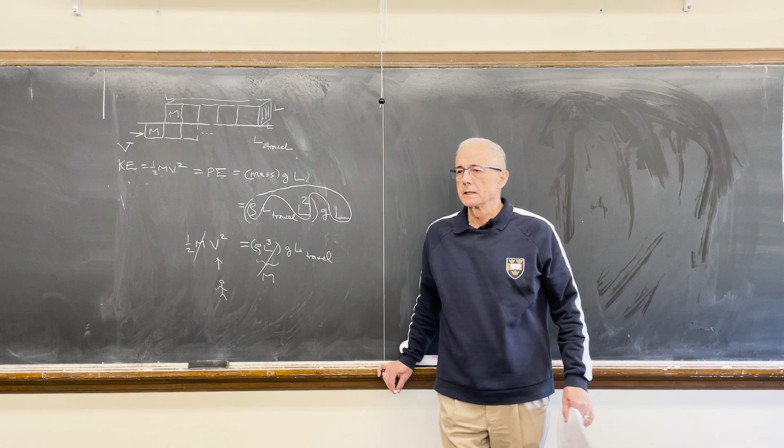We make a big step in the direction of answering the question, well, this is all interesting about animals, but what about us? So remember, in whatever you do, always ask: why is this important to me?

Well, it depends on your interests. If you're interested in predicting speeds at the Olympics, you can predict speeds at the Olympics using the formula. You can say, tell me the size of the sprinter, and if that person is tall, he has an advantage. It's the same in swimming.

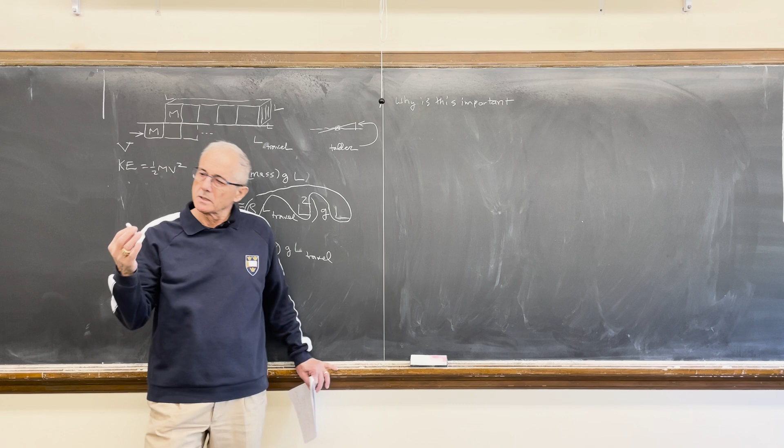In swimming, even though the swimmer is horizontal, here's the surface of the water, and the swimmer is oscillating - basculating, that's the French word for it. A taller person lifts his head and shoulders higher above the water. So athlete size has the same effect on speed regardless of medium. That's how you predict that the fastest swimmers should continue to come from athletes who are bigger.

And you can take this little hint all the way to ending all sorts of controversies about competitive sports. But why is this important to all of us who walk on Earth?

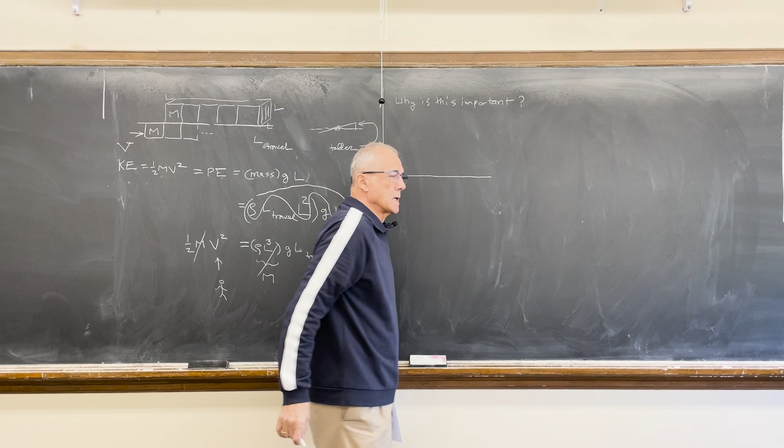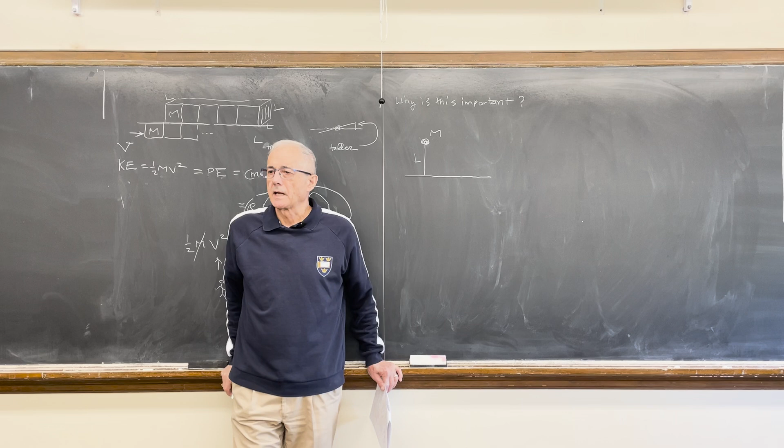Let's take a look. I had a one-scale model of the moving animal, body mass and length scale, and I drew it as a cube or as a sphere. I can also draw it as a stick of body length L, and concentrate the entire mass at this point. So that drawing is equivalent. I know, of course, I wrote it many times, this M is density times L cubed.

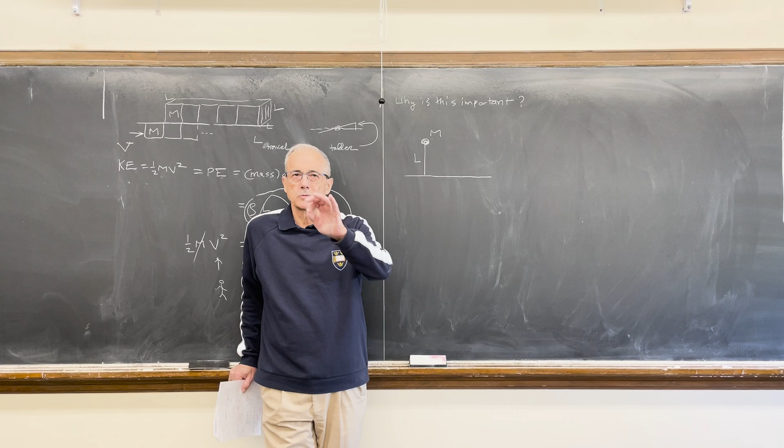But I draw it this way to begin questioning the actual rhythm of this object as it moves forward. The story began with the fact that the so-called cruising flight at constant altitude, for any bird, is in fact a zigzag motion, okay?

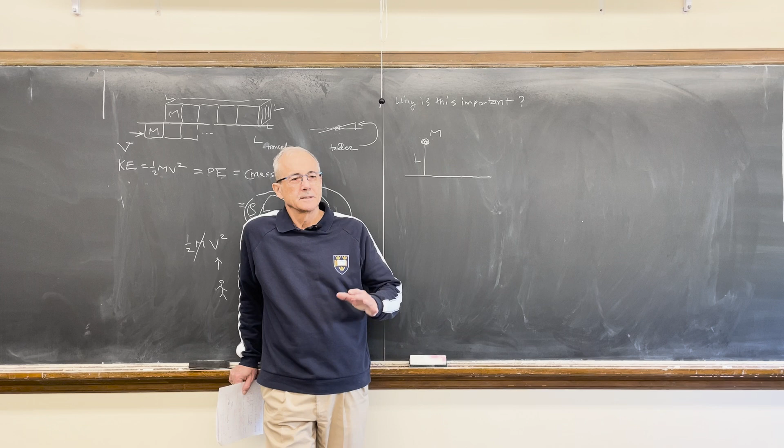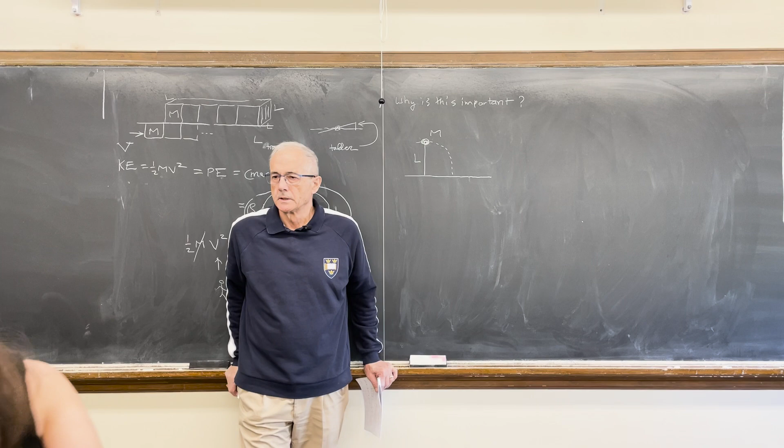If somebody attaches a light bulb to your head and lights it, and then makes you walk with the light on a very dark street, that light on the film will be doing this, you see, because the stick falls forward. You don't fall all the way to the ground because you have not one stick, you have two - you have two legs. But the fact is that the center of mass of the body is falling forward.

And then the story continues. From a greater altitude, the falling forward velocity is bigger. But during this fall, the horizontal velocity component decreases, all the way to zero. When you hit the ground, you're not going forward anymore.

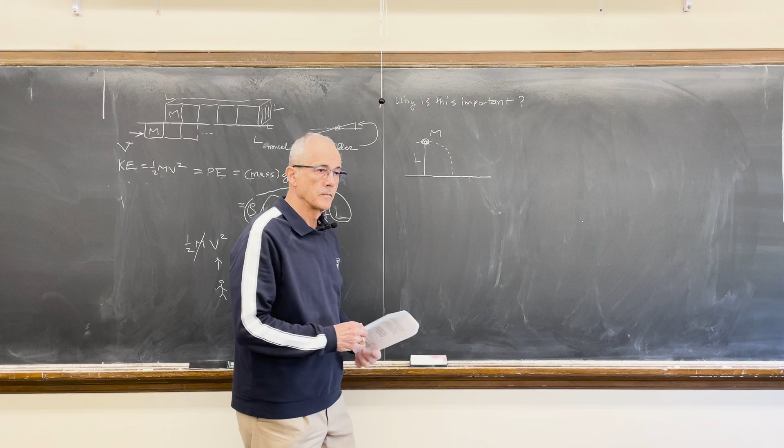The fastest fall forward happens when you are close to the vertical - we'll call this angle theta. In this regime, the speed forward that you acquire is the greatest.

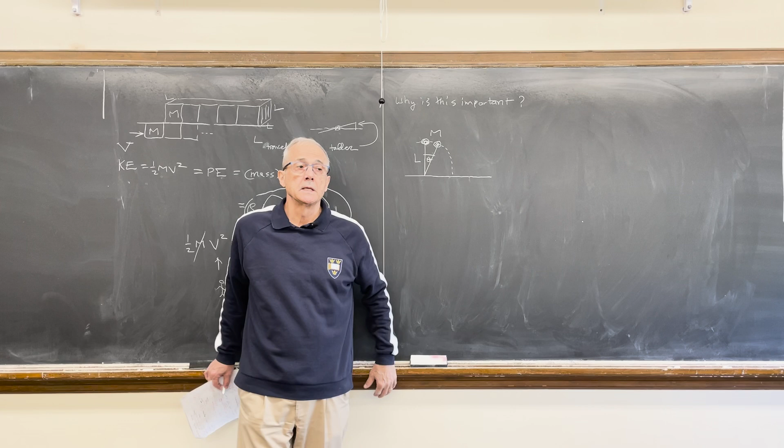You have this experience when you're riding on a Ferris wheel. On a Ferris wheel, your speed in the direction of rotation is greatest when you're at the north pole of that circle, and then zero here, then it becomes negative at the south pole.

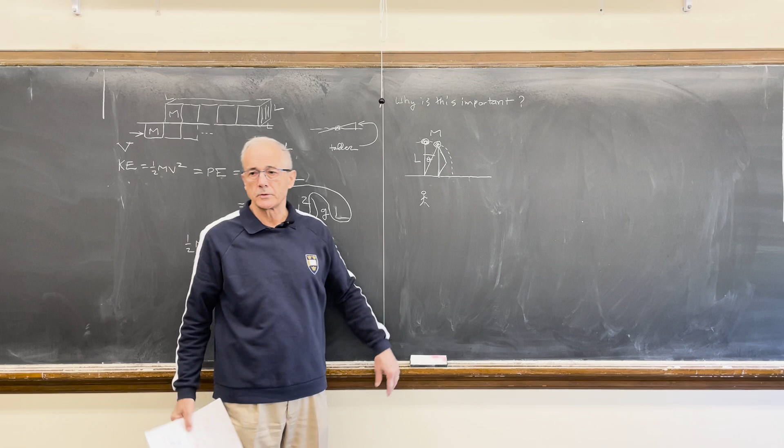But you're not interested in dealing with the subterranean world. And what next? In the case of the person - this is you - what next is not a disaster, because you have a second leg that steps here, except that the second leg has to be bent at the knee because the distance to the ground is shorter. And the knee is equipped with muscles that extend the femur and the tibia in order to lift the body to the altitude from which it fell.

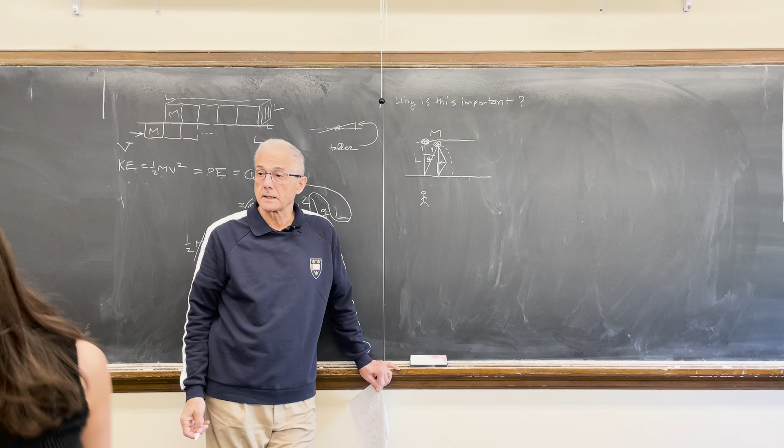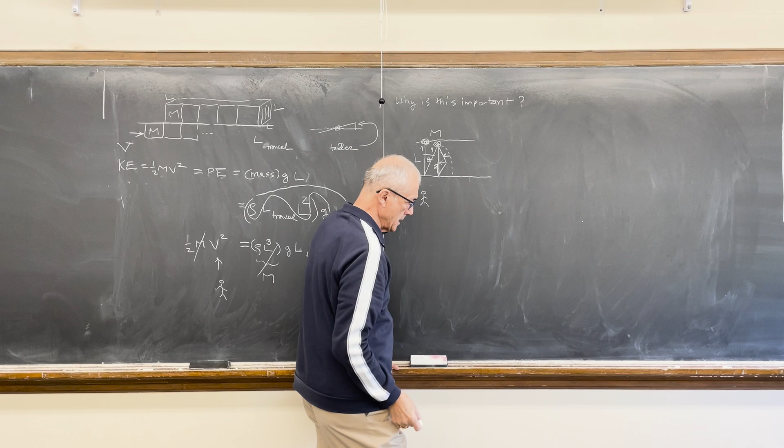So if this is leg 1, and leg 1 is here, then the end of the so-called cycle is when leg 2 does what leg 1 did - this is leg 2 arriving here. I draw only the trajectory of the top. The trajectory of the top was like this. So if this is leg 1, this is leg 2, leg 1 again, and so on.

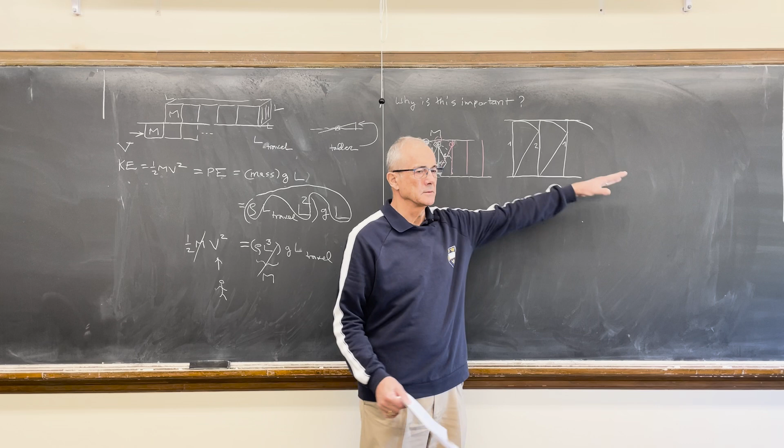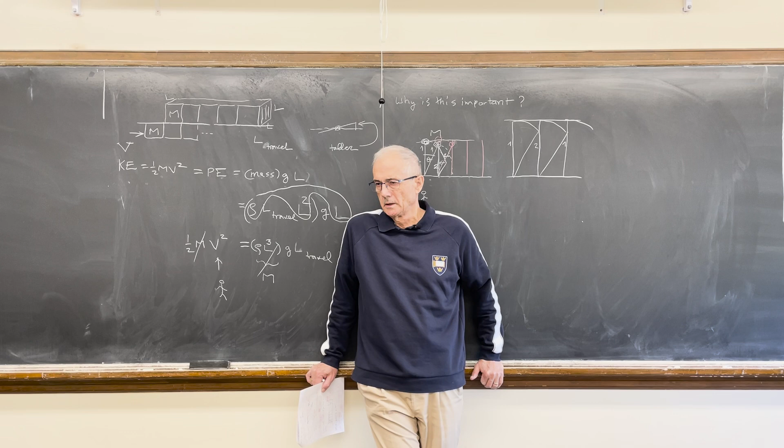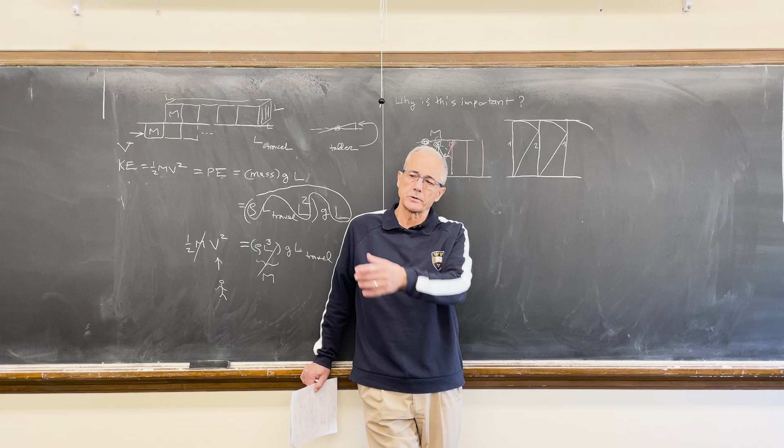It's a little tough to visualize this, meaning let's call it rectilinear motion due to stepwise wisdom of trying to stick to the vertical. Incidentally, this is why walking is tricky business. People fall, especially as they become old, or they trip and fall at all ages, because people walking or even standing up are inverted versions of the pendulum that Jack mentioned a few minutes ago.

And that's the sort of act that you see at the circus, holding the ball at the top of a stick. So it would make sense from this that the further the angle goes down, the more you accelerate, and that kind of makes sense because sprinters lean over a lot in the beginning. I'm wondering if you have any insight as to why sprinters start the race taking a series of steps while they're pretty much diagonal, but towards the end of the race they're all vertical.

The sprinter starts that way in order to, like any animal, prevent itself from hitting the ground. So the survival of the sprinter out of the starting blocks depends on that person's ability to avoid hitting the ground with his face. That is achieved by accelerating out of the starting blocks so that the body is left behind, meaning it's lifted or raised due to the effect of legs running faster than the body. But that only takes a few steps. Once the running position is reached, then it's all this kind of repetitive cycle.

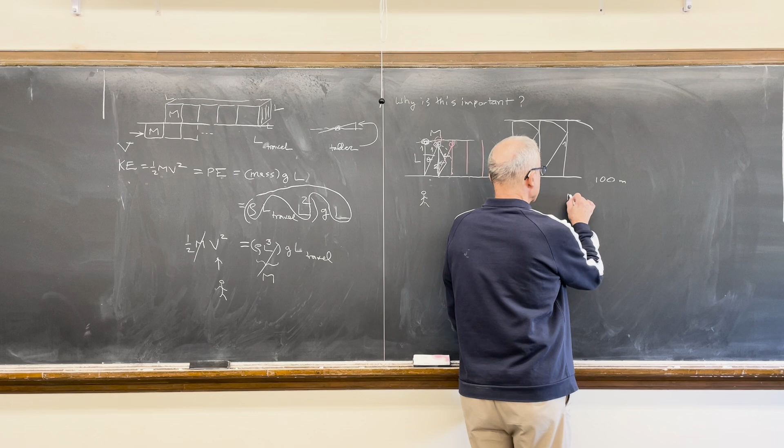Women, 50 steps. But you know why more steps? Because women, even the fastest, are shorter than the fastest men.

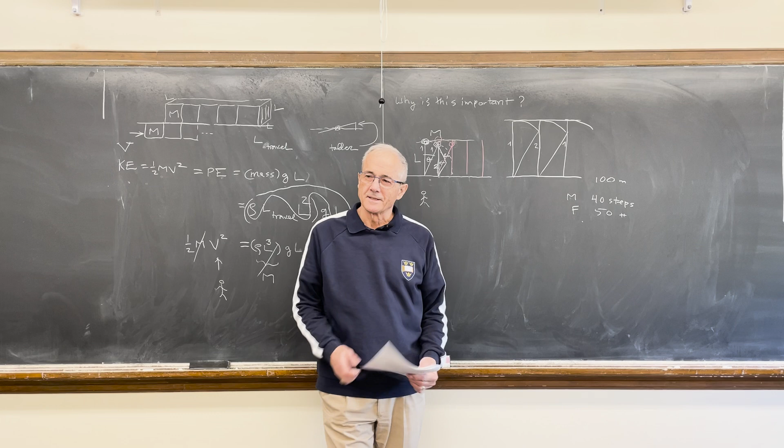You get this, used to be QED, quod erat demonstrandum. Now it's spelled duh, you've read that expression. It's pretty obvious if you know these scaling discoveries. Let's see now.

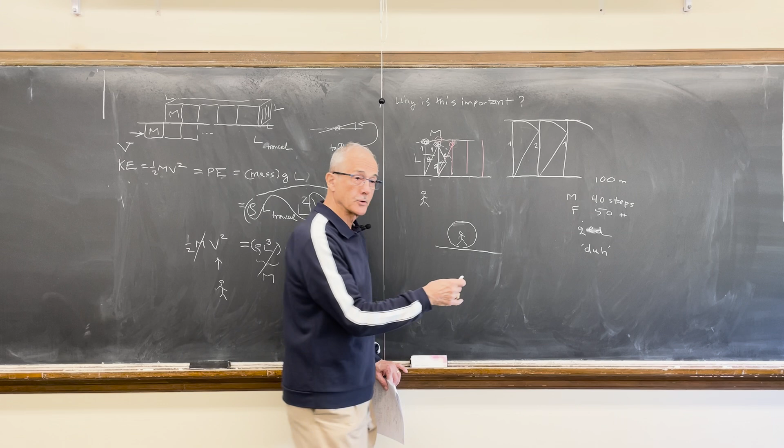There is a way to visualize this particular bit of mechanics. I don't know how many of you, when you're really tiny, crawled inside an empty cylinder. Where I come from, that was an empty wine barrel. Here's the on the ground. And you walk inside this rolling object. You think you're walking, you do this motion. But because the cylinder is rotating, you are always standing up as you walk, and moving is the assembly, meaning the cylinder.

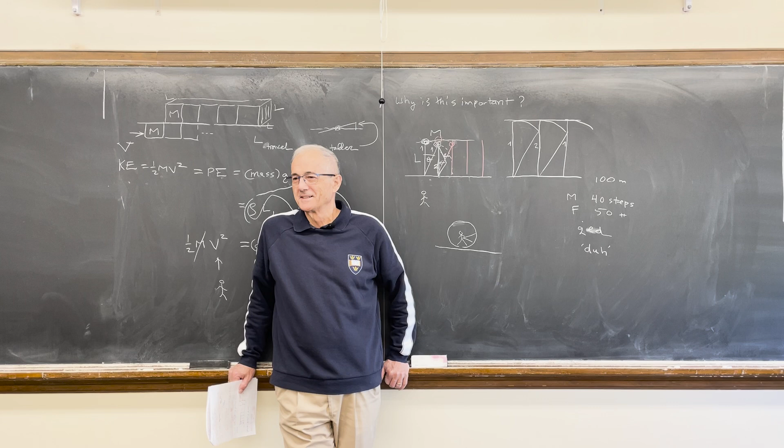You never did this? No, you did? It was a sphere, though. Okay, there you go. With that, you can expand the joke in all directions. Yeah, that's interesting, isn't it?

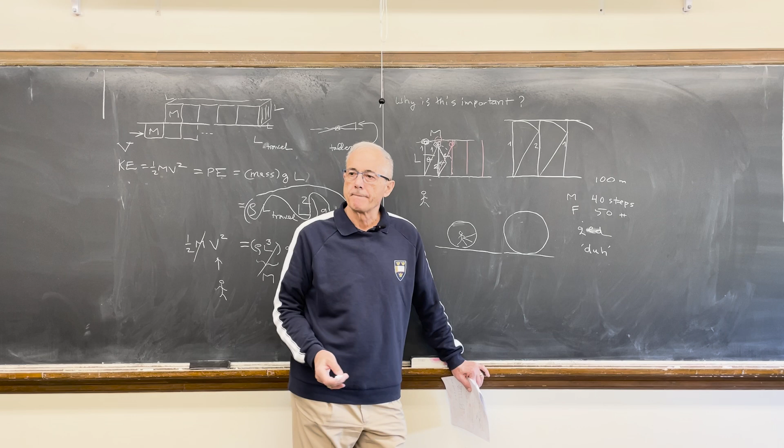Look at this. In that circle, you're a wheel, you say. Great idea, let me draw the wheel. And you again.

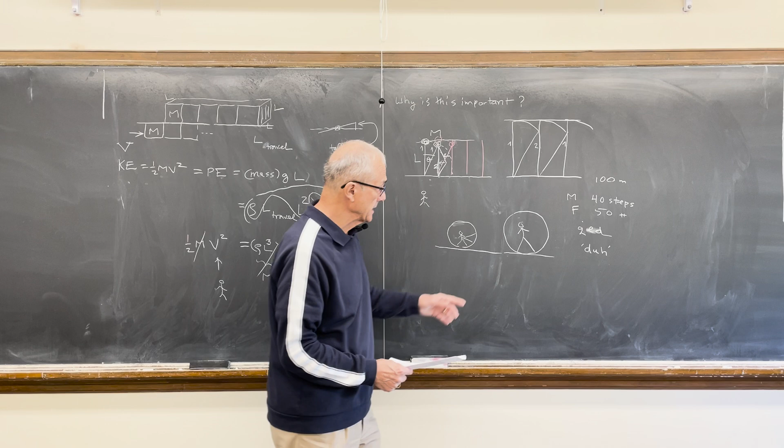Walking is in fact this motion, except that if the camera moves with the rotating wine barrel, the camera will see you taking one step after another, meaning that if this is 1 and this is 2, then it would be 1 again and 2 again. So bipedal walking is, in this case, a natural wheel with only 2 spokes. That is the lightest wheel.

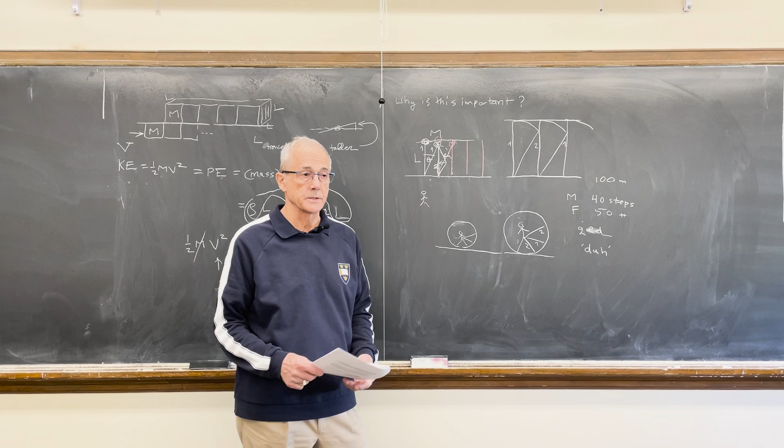What is evident is the wheelbarrow is from China. That is a little vehicle for carrying material, supported by one wheel at the front end. Anyway, so the wheel operates on this principle, but now that's the view from today.

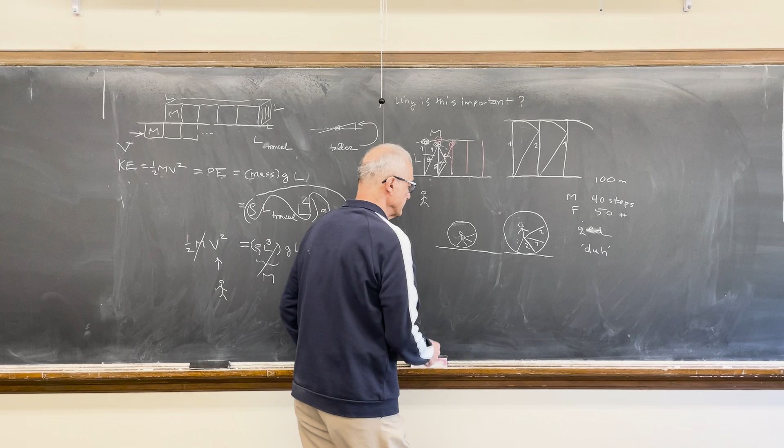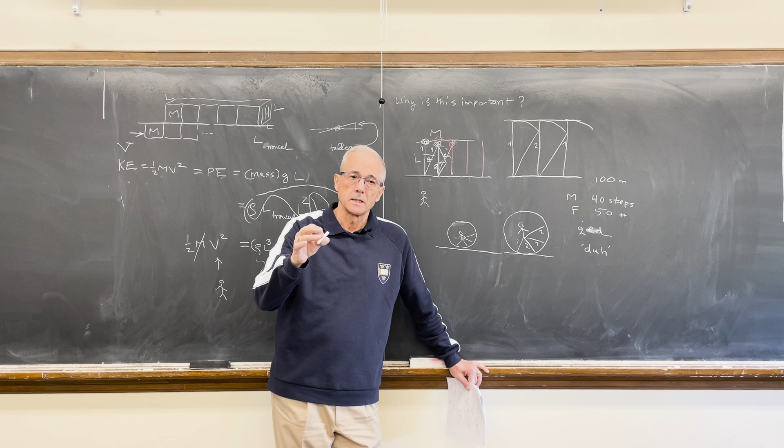Artifacts that are being discovered, you've seen them drawn on the chariots of antiquity. The oldest wheels that you see in the bas reliefs, say Persian architecture, Babylon, these places, those wheels were solid. So, solid wheel on an axle.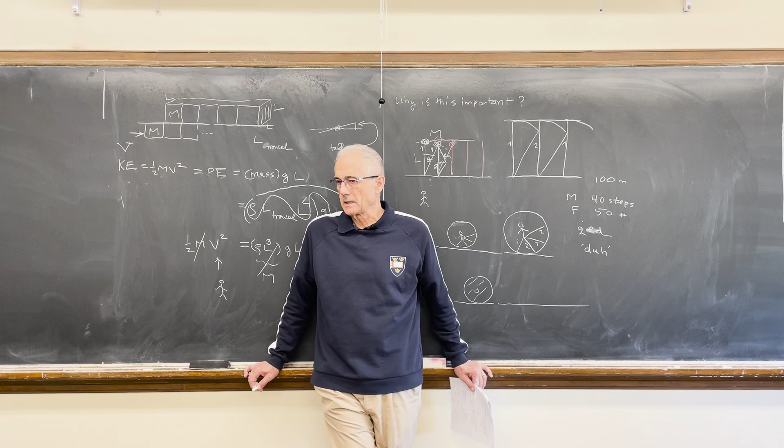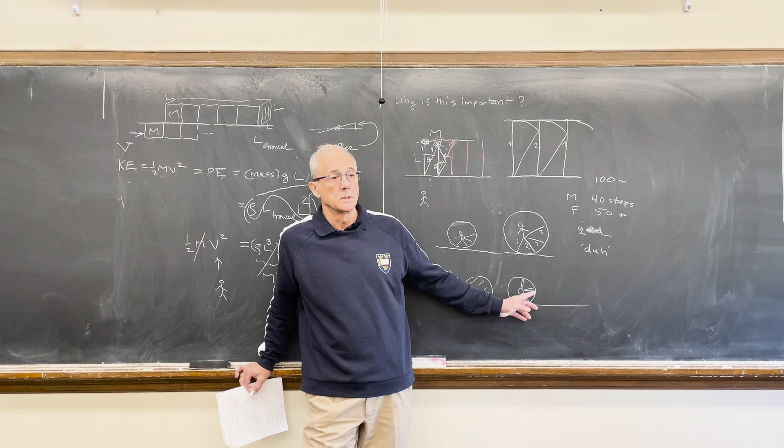Then this technology evolved in the direction of lighter and lighter. You see in warfare, say the time of the Renaissance, those times the wheels - and by the way, wheel making became a very, very important technology - had a hub and then wooden spokes. What happened from antiquity to medieval times? The wheel became lighter.

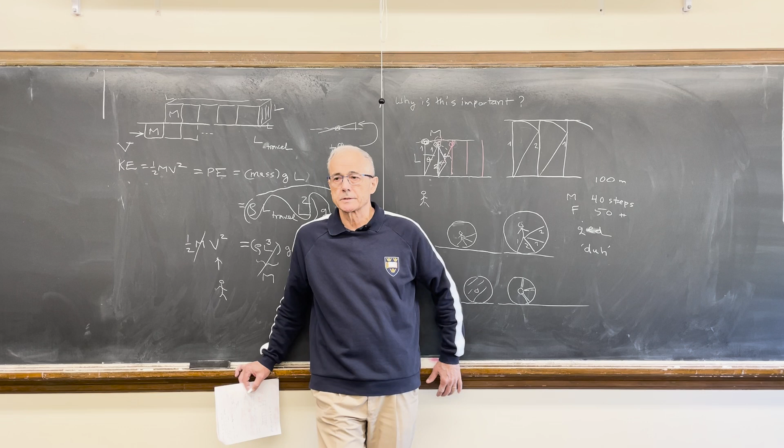Pay attention, you'll see this in drawings, but especially in movies. Time of Napoleon, these wheels had become even lighter because the spokes were thinner and more numerous. And so, lighter.

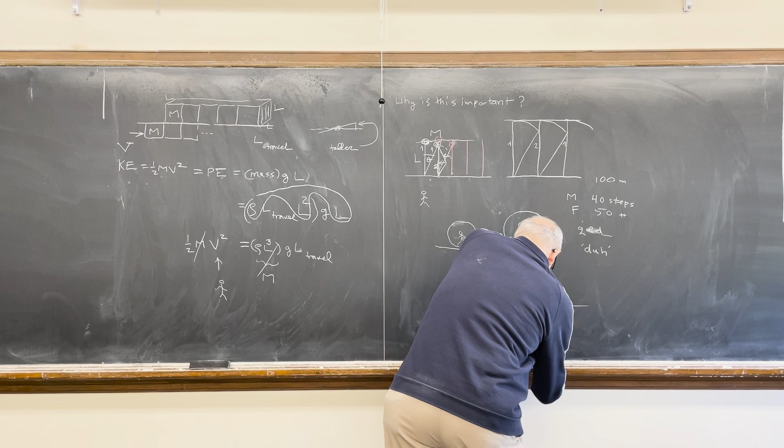What would be the lightest wheel that you've seen on display today? You see it sometimes in these bicycles that run on the velodrome, for speed at the Olympics. They have how many spokes? Hey, this is planet Earth - they have 3 spokes.

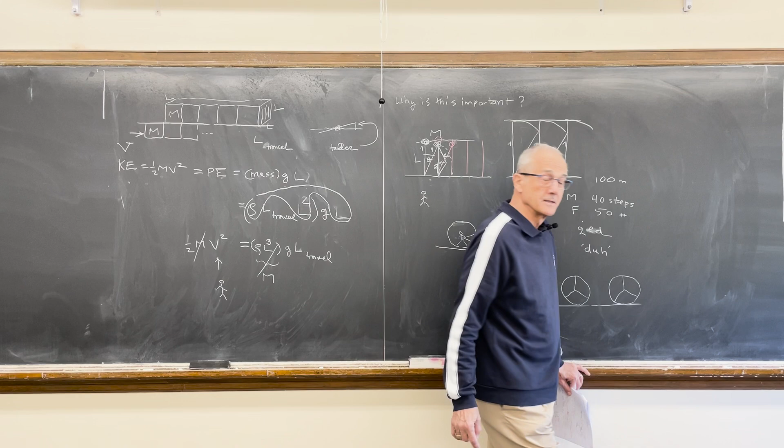And that is because these people in sports are plagiarists. The wheel makers who came up with this idea were who? Where did you see this drawing? The logo of Daimler-Benz is this. So the idea, look, there's a time arrow here in the direction of lighter.

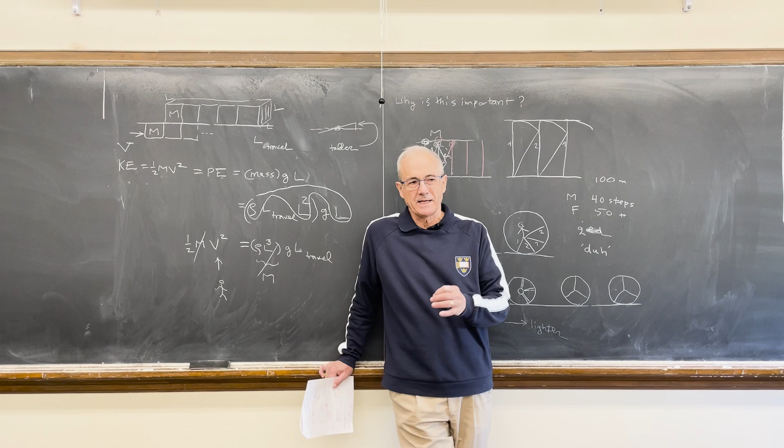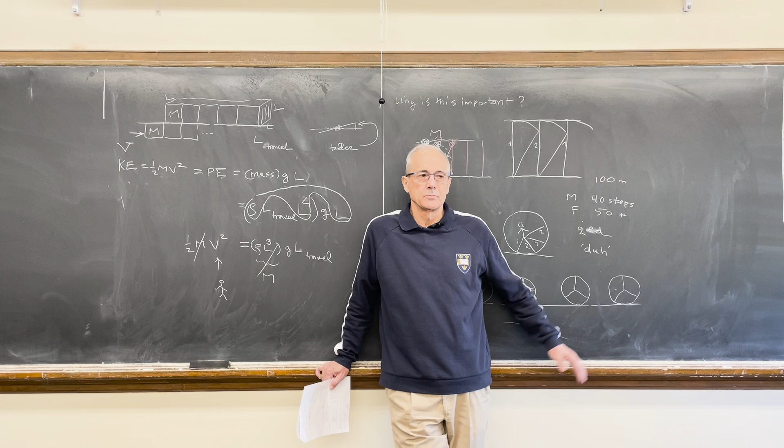Obviously, you have to have the technology that makes the spokes. The spokes at the Olympics on the bicycle are aerodynamic in cross-section, and they use materials today like titanium that did not exist just recently. But that is not the point. The point is that the drawing speaks of lighter and lighter. Why? Because the mover is not into wasting effort.

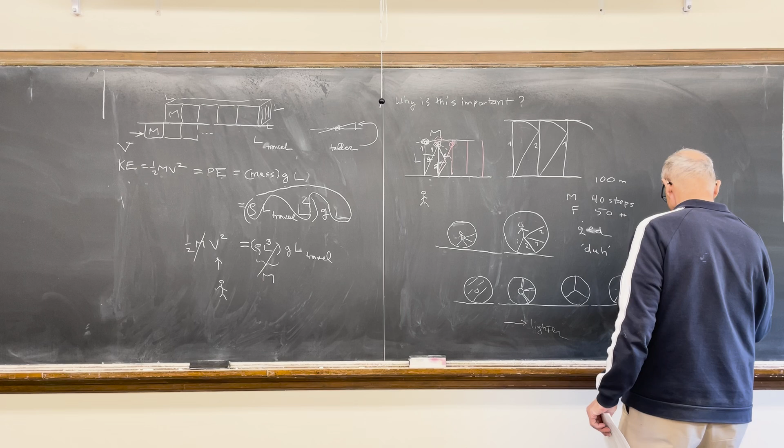What would be the wheel that's even lighter? It's the one with 2 spokes, which teaches what lesson? Don't you report me to the authorities - that no, the wheel was not invented in China. It was invented in nature. See, this one.

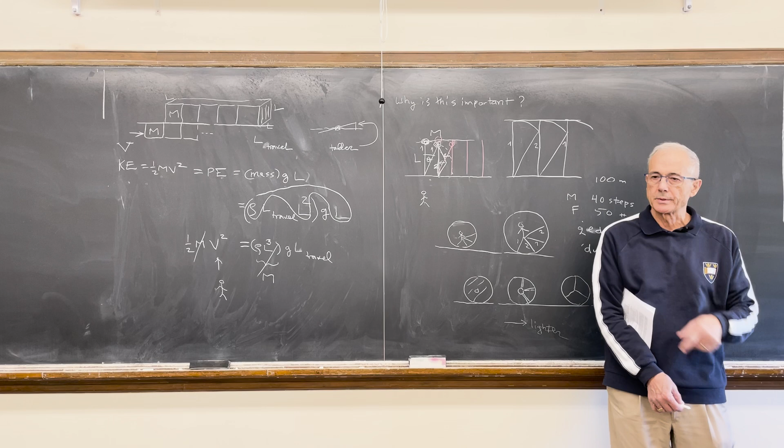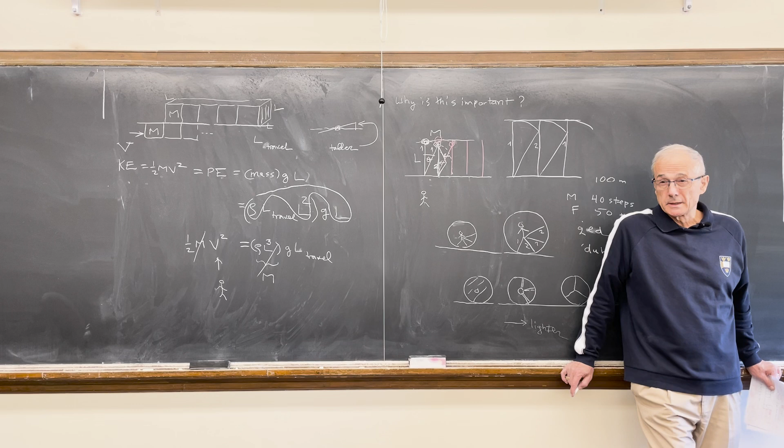People say that the wheel, the human wheel, talk about the one from antiquity, has an axle. Sure, but the joints in the pelvis are even more evolved than the axle of the wheel, because the axle of the wheel permits rotation in one plane, movement in one plane. The joints in the pelvis allow the femur to go in all directions. So the so-called ball joint is a design with much greater freedom than the wheel on an axle.

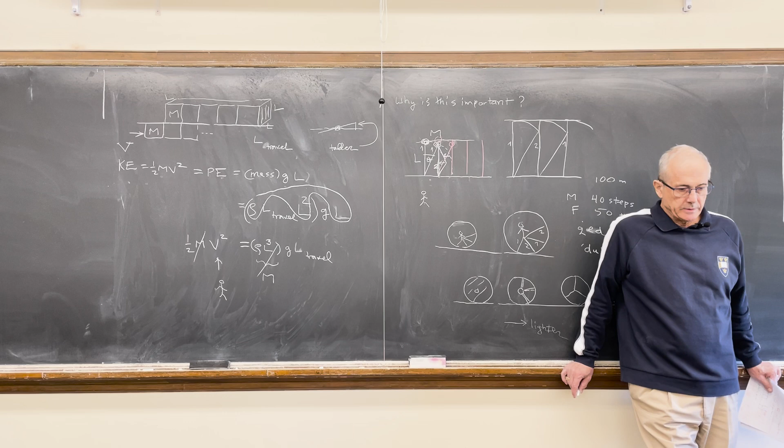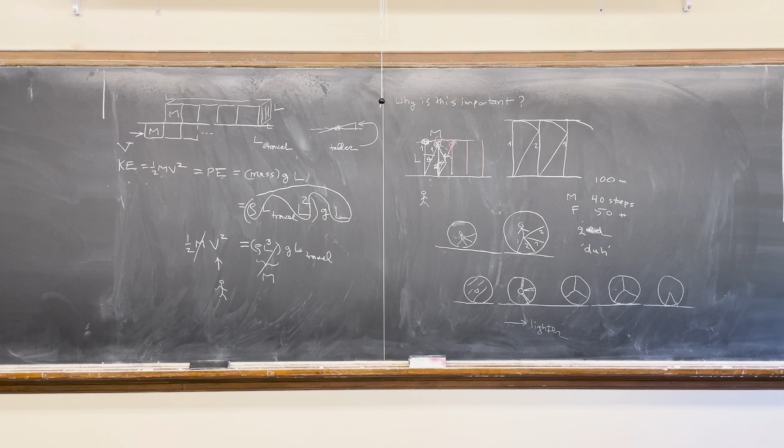Let's see, now I want to tell you something else before I get into ball joints. Maybe it will occur to me as I pack things up. Oh yeah, so if nature invented the wheel...

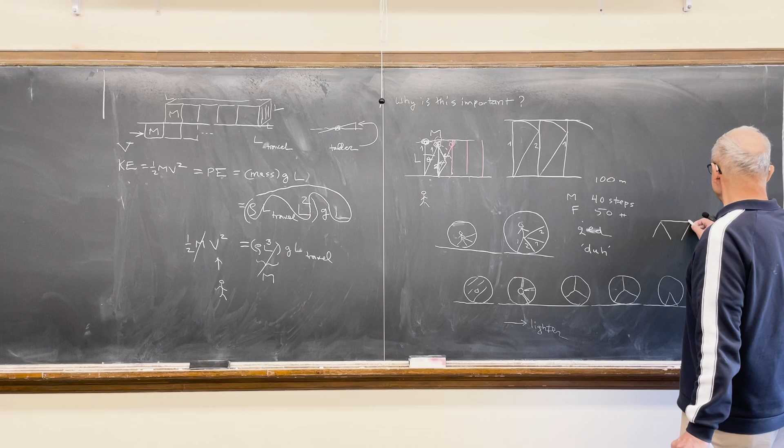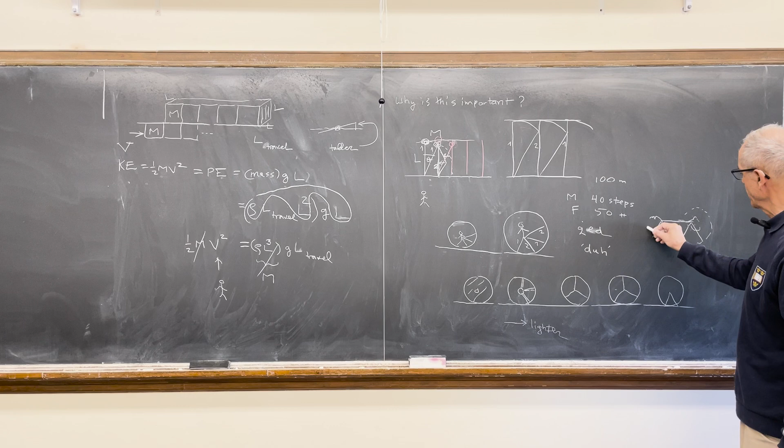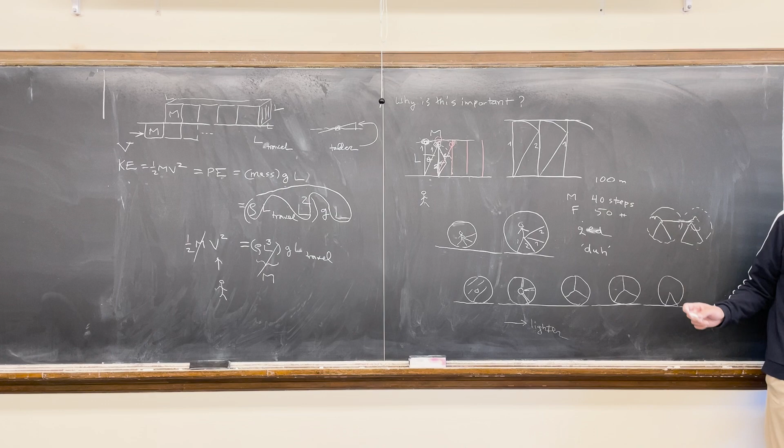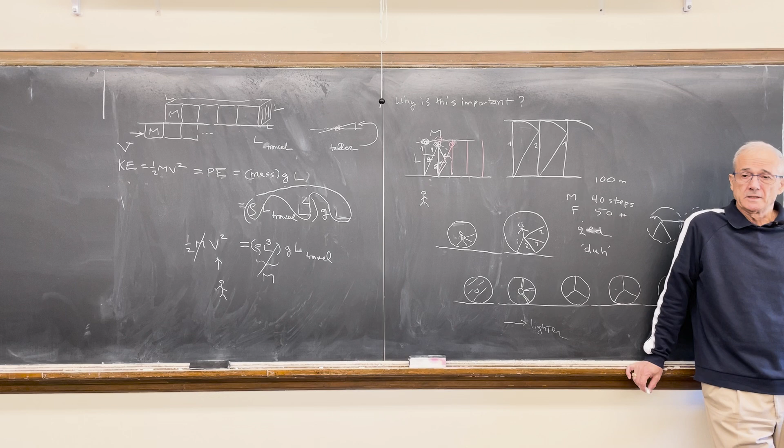What about the bicycle? The quadruped - here's the quadruped, you can draw your own version, maybe this is a piglet, okay. It's the same story with a wheel here, and another one rotating here. Quadrupedal motion is the same idea. Incidentally, the wheel of nature has a huge advantage because of this bending knee, rolling on terrain that's significantly uneven, unlike any of the wheels of technology.

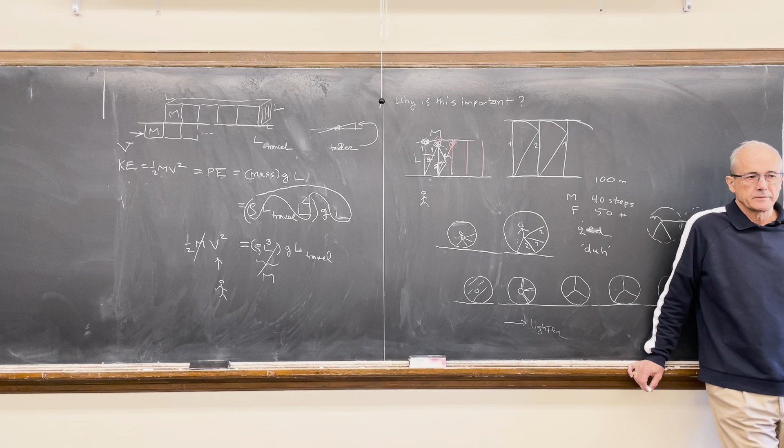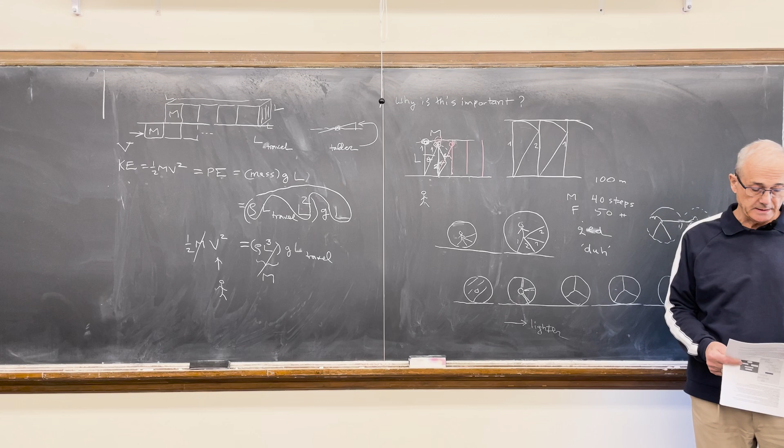And when you look at these movies with Star Wars and whatever, but also movies of vehicles on Mars, they have wheels that are designed for uneven terrain. Well, the best wheel for that would be the robot with flexing legs.